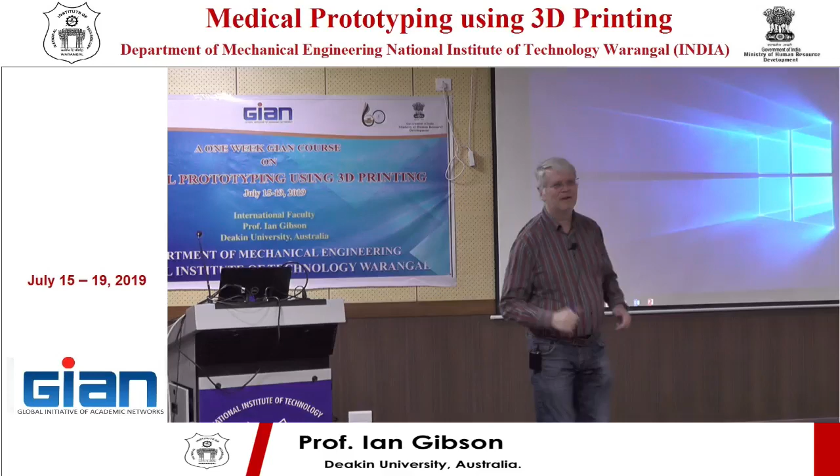Right, let's talk about the future. We'll do that on the board because we'll do that as I think, okay?

So what? Future of what? Future of additive, or future of additive in medical? What do you think we should talk about? In general, okay, so future of AM, yeah?

I've got a couple, I've actually got maybe a little bit. It's an old presentation which I gave. Did anybody go to Inside 3D Printing when I was presenting in Mumbai? No? Good, okay. All right, I'll show you the presentation I gave there. It was a couple of years ago, but I think it's still quite relevant to today and this kind of discussion. What is the future of additive?

But let's just move along a little bit. Some of the things that are coming to my mind, what I'm seeing a lot of at the moment is, if I see AM, there's sort of like a bit of a divergence effect, in fact. And the way I might be able to say it, maybe even three ways.

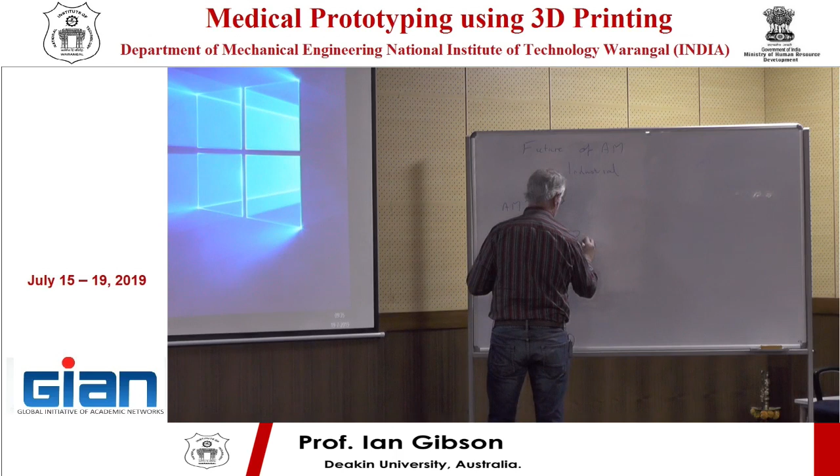Industrial, research, business.

From industrial, there's a lot of interest. What is industry looking at from additive manufacturing? So they have a number of requirements. Biggest one probably is quality assurance.

So when I say industrial in this context, I'm saying people using additive manufacturing for making things, okay? So direct digital manufacturing, as we sometimes refer to it, certainly what Brent Stucker used to call it.

So that might relate to things like consistency of build, ability to detect problems during or preferably before they happen, at least definitely detecting them as they happen, so that the worst case is you can stop the process. But ideally what you want to do is actually detect it during the process and maybe change the process to compensate for it, which means prediction.

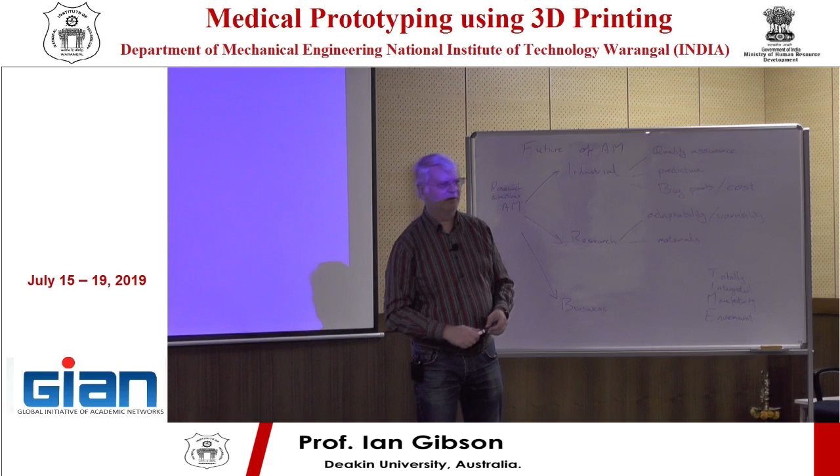I had this vision of some kind of carousel system - not just carousels with the feed heads, but carousels on the actual machine itself, where you can feed a part in a variety of different ways through a system, treat it in different ways, change the sequences, and come up with a lot of huge potential in variability. That machine, I can't remember the name of it now, that I showed yesterday, is kind of part of my vision of a time machine. So materials and adaptability are great for research and cost.

Bringing the cost down is one of the great things, and the reason why there are so many people excited by additive manufacturing is because we can all see it and see that we have access to it. It's cost effective, it's low cost, we can use it. I can give it to a student and not be too worried about whether that student breaks the machine, because it's not going to be a huge investment to fix it.

In the old days, you never replace them. I'm sure you've all had that experience: look but don't touch. And you don't learn that way. You learn from experience, you learn from doing things, and personally I say you learn from making mistakes. This is the disruptive side of me - the things I learned most were when I did a bad job, and I never want to be in that situation again, so I try my best to work at it.

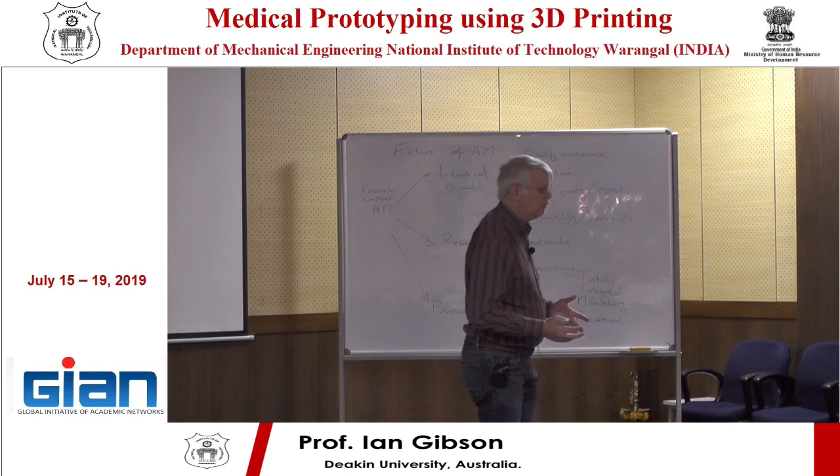Okay, anybody been involved in startups? A few. Excellent. How many people would say that they've been successful in startups? One, maybe. Yeah, it's a hard process. It's a very exciting process, and it's a very rewarding process, because you learn an awful lot outside of your own discipline, yes?

And if you don't, that's why you fail, to be honest. Because a great idea is only the starting point. Even a great product is only the starting point. How many great products have actually failed? Many, many, many, okay? I've got a good example of that.

And that's probably relating to what I've got here. And rather than put it up on this thing... the projector's shut down. Can we start the projector up again? My computer's shut down as well. I'm going to have a strong word with Michael Dell when I see him next time.

Just bear with me. Any questions while we're going at this point? Amazing, I think you guys have started to exhaust your questions. Finally. I have to compliment you all, by the way, for the amount of participation in this workshop.

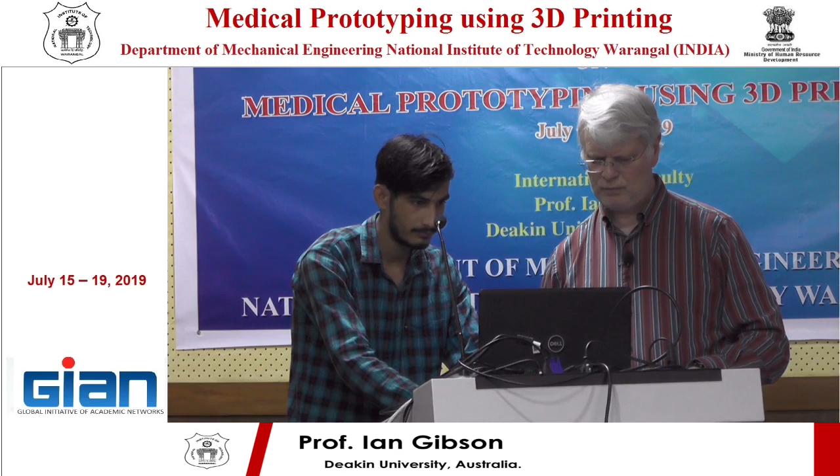Oh, I need sound. I think that's going to work. Let me check. That's probably because it's here. No, that's here, isn't it? Why is not sound? Oh, volume? No, it's definitely not coming through. Do I need the other thing? There was... Ah, yeah, that's probably in it. We're okay now, yeah. I'll try that. Yeah, excellent, good.

Right, so let's play this. Autodesk. We'll have a Zen moment. It's cool, this, isn't it?

Are any of you familiar with the Autodesk Pier 9 project? Autodesk have this location in California. It's called Pier 9, and it's really sort of like a bit of an incubator innovation center. And some of it's very interesting work, and you're probably familiar with the old zoetropes. These are trying to create moving images by just rotating them. This is a 3D zoetrope, an actual object that appears to be moving because it's rotating. And it's beautiful. I think some of the parts that have come off this, absolutely excellent.

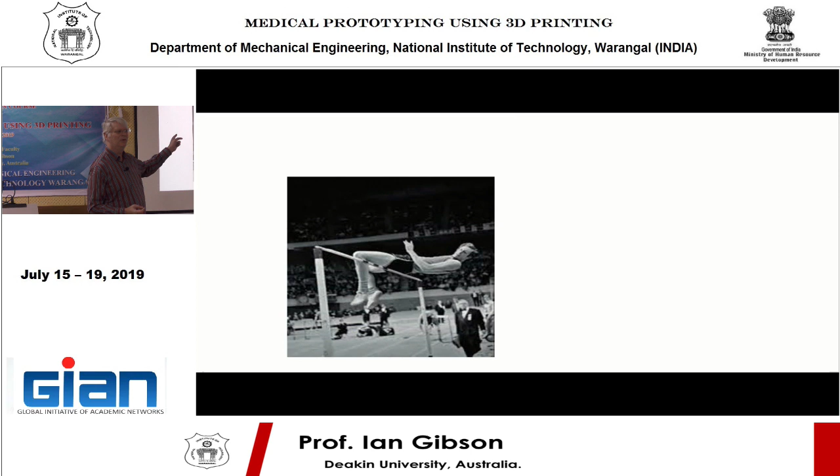Anybody familiar with this guy? Anybody think of his name? No? Any high jumping specialists in India in the Olympic Games? This guy's name is Dick Fosbury, and he's an American, and he was a college student, and he lived in a small dorm when he was at college, and he had the top bunk. He shared the room with another guy, and he had the top bunk, and he was a bit of an athlete. He worked out this method of getting into the bunk. You know, you had the door open, he'd go into the door and spin round and land on the top of the bunk.

And he kind of thought, hey, hang on a minute, this is actually quite a cool way to do the high jump, because before this guy everybody did what was called the Western roll, where you faced the bar and put your front leg and tried to roll over the bar. And that essentially was a limitation on how high you could jump. This guy then worked out a method to jump higher, won a gold medal. And now everybody jumps this way, and all the high jumpers have to be. So he was an innovator, the first person to do this, and he's a great example of what we call a disruptor.

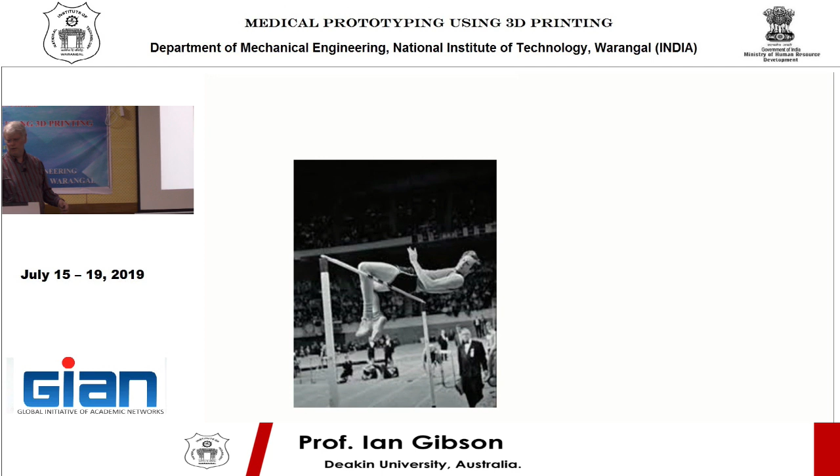So Dick Fosbury, basically what I would consider to be a prime example of a disruptor. And you think about this from the perspective of business. There's a couple of examples, it's about success in business. There may even have been people that tried to do this but maybe didn't have the skill that Dick had, or the stature or the athleticism. But he was the one that everybody now refers to, the Fosbury flop. That's the method of jumping.

So he was a radical changer, applied innovative thinking. Who's that guy? Fantastic. People know him, even though he's been dead for a few years now. Obviously, one of the people that we associate with innovation, correct?

But none of the technology that Apple produced was truly innovative from a technological perspective. It was the packaging, the presentation, the fact that you had an astute businessman, because that's what Steve Jobs was. He wasn't really a technical geek, because you had Steve Wozniak, amongst others, and Jony Ive and other people supporting the Apple technology and developing those key cool ideas. But he was definitely a visionary.

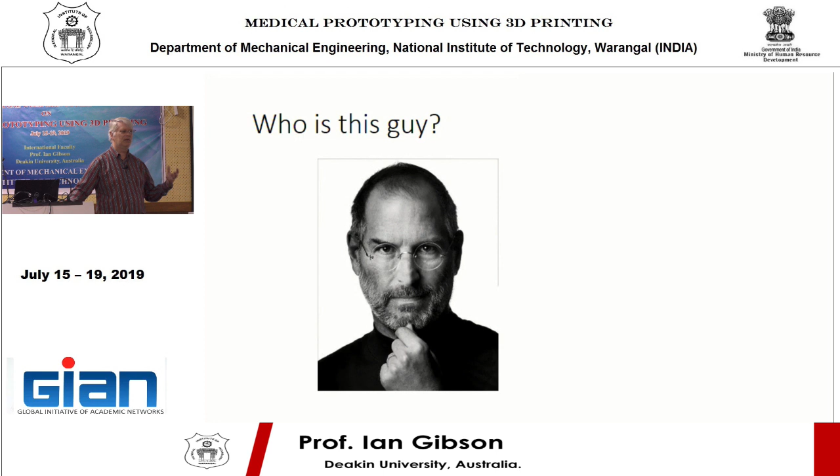He implemented or allowed the implementation of technology before it was potentially successful. Things like the touchpad - I mean, people do that, but he managed to package it up correctly. Personal computers, the iWatch, various things which other companies did as well, and sometimes did in a better way. But for some reason or other, the packaging and how it was presented by Apple was better and more significant. So he's definitely one of our most well-known innovators of the modern generation.

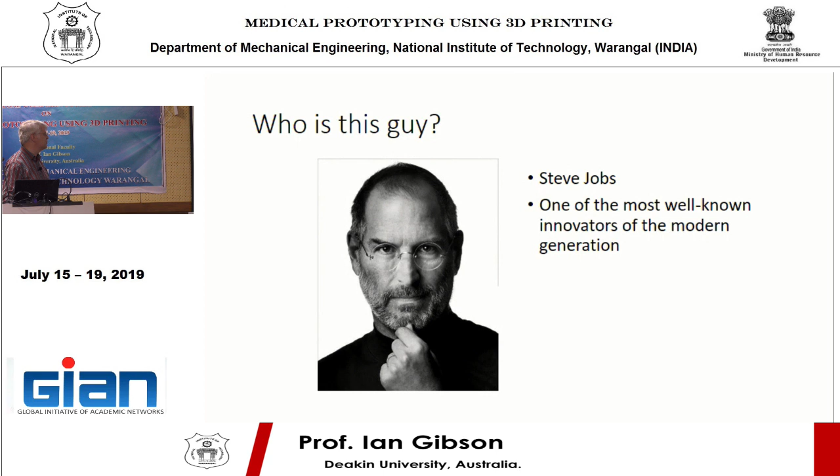Any idea who this guy is? Okay, I'd be very impressed if anybody knew who this guy was, particularly if you're not Australian. He's actually an Australian. His name is Silverbrook. And even now you probably don't know why I'm presenting him to you.

He is, however, an Australian inventor. He has to his name 4,665 US patents and 9,874 international patents. He actually holds the world record as the most prolific inventor alive today.

Most of his patents are in the areas of printing technologies, so a lot of the 3D printers that we use involve his patents. Sound technologies - a lot of the sound systems that we use involve his patents. So he's a technical inventor. All of these things in front of him are things that he has been involved with - that's his lab and his patents and stuff like that. So he's a very successful person, but we don't know it.

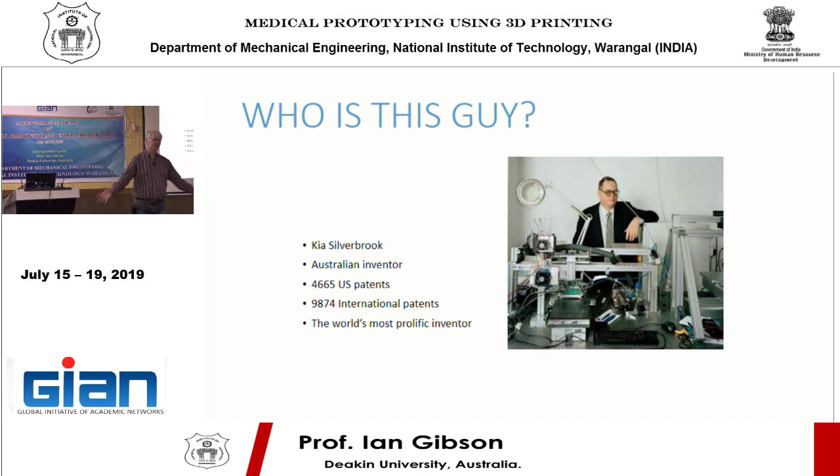So it's not necessarily - you can be successful without having to be famous, and possibly vice versa, I suppose, depending how you spend your money. Worthwhile mentioning that there's room for lots of different types of people in this environment as well. And I suspect he'd be the sort of person that would be behind somebody like Steve Jobs, helping him to supply the technology, which then people like him can then promote.

I think we also know about James Dyson, yeah? This figure, however, is another number which is worthwhile bearing in mind. He's famous for this vortex-based generator for vacuum cleaners - the bagless vacuum cleaner. The fact that it's a very efficient way to create a vacuum, it doesn't degrade in vacuum suction power over time because it doesn't clog up as easily, things like that.

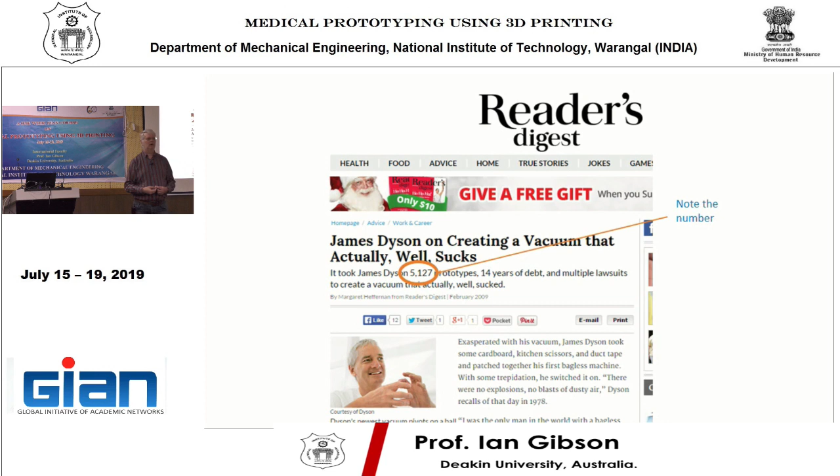Before he got to a working prototype that he felt worthy of presenting for production, he went through 5,127 prototypes. So he's cataloged this - I always present this to my students when they're doing their final year projects, because I say, look, don't divide your time up by beginning and end. Divide your time up into segments where you want to achieve a particular goal, and then continue doing that in an iterative way.

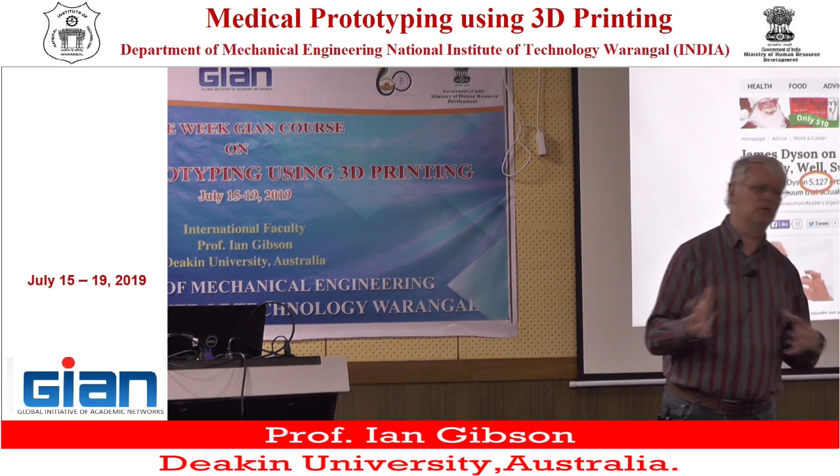Most students, when they think about their project, they think, okay, this is the problem, this is what I need to provide, I've got 10 weeks to do it, that's my project. What we look at, particularly now that I'm in a design, production and management department, is I get my students to think in segments. And you should think the same way, whether you're a researcher, whether you're thinking about setting up your own business, even if you're an educator.

I hate education systems where you basically say, what do I need to teach in order to fill up 10 weeks? Because that's what most courses are - you have a 10-week or a 12-week semester, and you're supposed to teach fluid dynamics, so you continue teaching fluid dynamics until the time is up. Nowadays, what you should be doing is thinking, what does my student need to know? How much fluid dynamics does that student need to know in order to solve the problems we are currently working on?

So myself and my colleagues, we break up our course material in that way. And if it only requires 2 lectures, then only deliver 2 lectures. Now bear in mind, this is coming from a person that has been told he has to present 10 lectures on a subject of medical prototyping. I realize there are artificial situations in everything we do. But the important thing nowadays is that we want our students to be work ready. And if you want that to happen, you only teach the amount of fluid mechanics or fluid dynamics that you think they'll need to get a job.

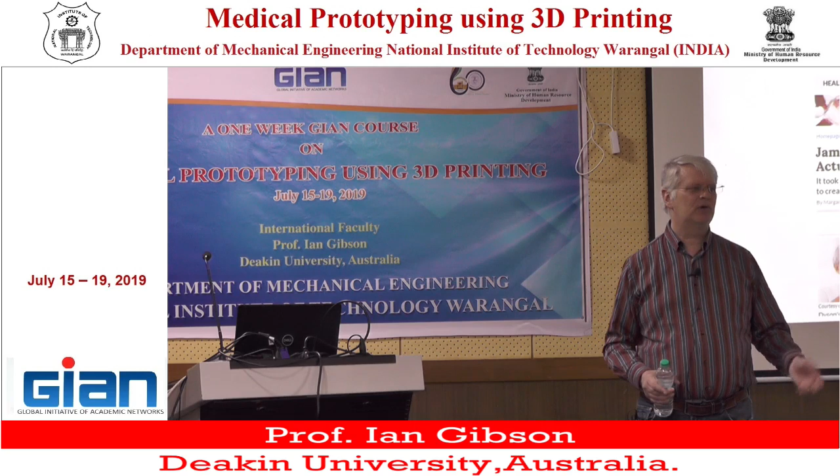And that might be different for one student to the other. So what we should now be going back to is the old days. Oxford and Cambridge universities still teach that way - there's very few lectures, it's nearly all tutorials. Your students go in little groups to the professor, talk around a subject, and work out what it is you need to know. You guide them through the learning process. Because you've got very clever students paying lots of money for tuition fees, it can be enabled that way. But we should all be doing that, to be honest.

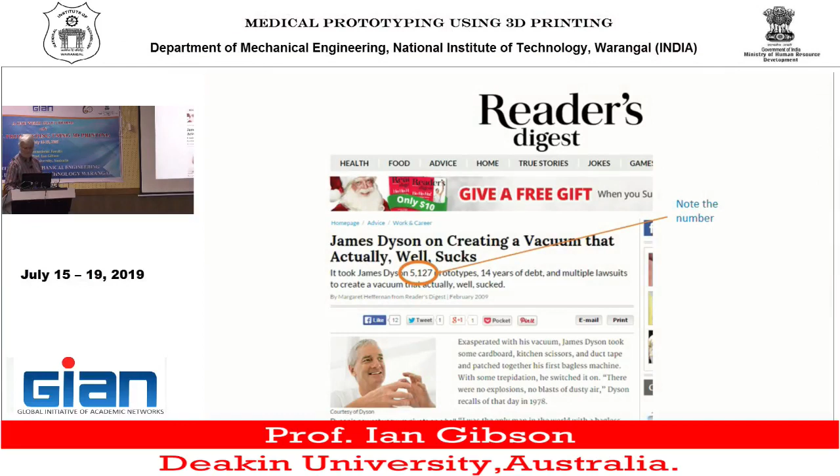Anyway, I am, as usual, moving off topic. So I've got a few images now where I want to enthuse people or encourage people to be thinking creatively and innovatively.

So the fashion industry is now starting to use additive manufacturing in a variety of ways. A lot of them, in my view, quite questionable. Visually, the impact is fantastic. I prefer clothes which are comfortable, and I haven't really come across many examples where 3D printing helps with that yet.

I mentioned about things like gaming figures, and the fact that whether we like it or not, a lot of people spend a lot of time and money on playing games. This is part of our society's culture, you call it what you will. I suppose it's always happened. The thing now is that you should be considering the possibility of making businesses out of it.

Musical instruments - it's becoming more and more common these days to use 3D printing. It's a great combination, if you like, of combinatorial technology, where you're combining innovation and creativity with functionality.

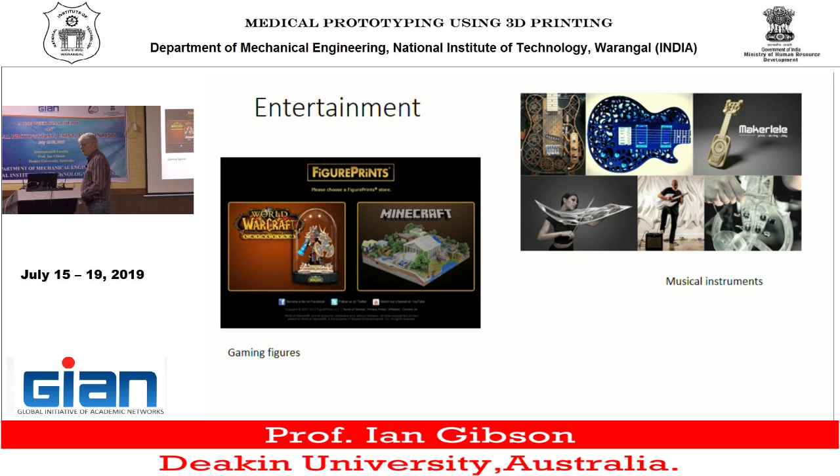I mentioned the FigurePrints thing - there was a video about how you produce these FigurePrints. So your 3D printed model starts off as the game model.

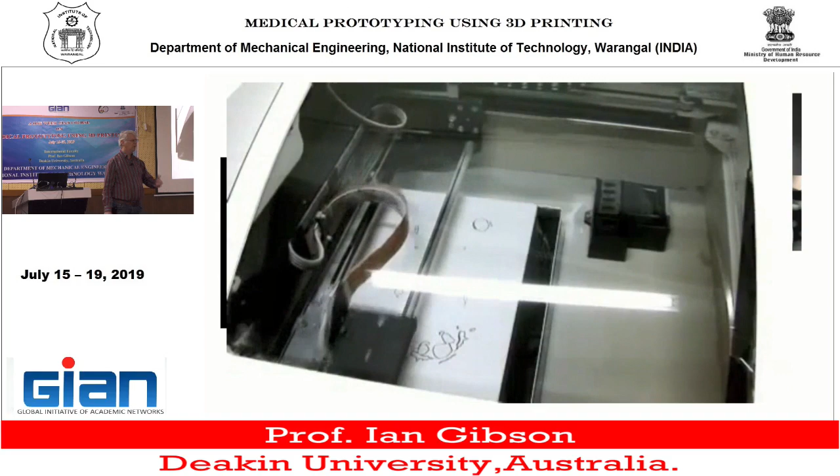Think about what I mentioned about gaming when I talked about scanning technology. You can fool people when they're playing a game that something is more three-dimensional than it actually is by using bitmap ray tracing techniques and rendering methods. That doesn't work when you're actually 3D printing, so there's actually a lot of post-processing of the game data before you can make the part.

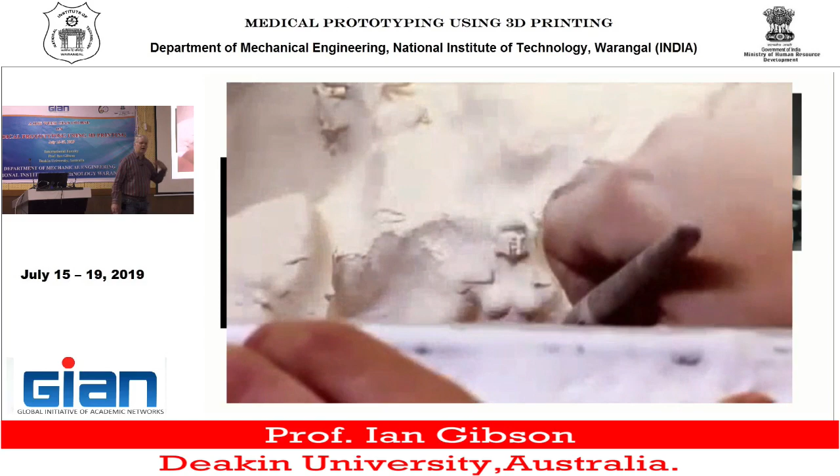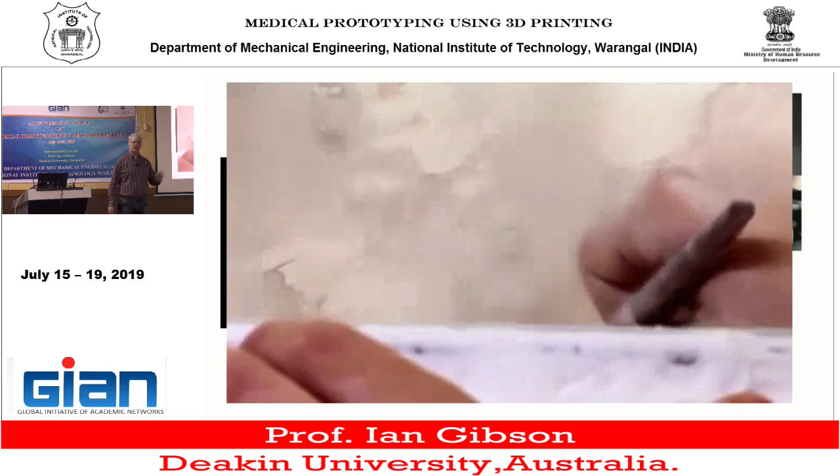For example, if the character is wearing a cloak - a cape - that cape in the game is a zero thickness surface. And if you print that, there's nothing there. So you have to post-process the game data to apply thickness to the components. Some of the features might be very fragile.

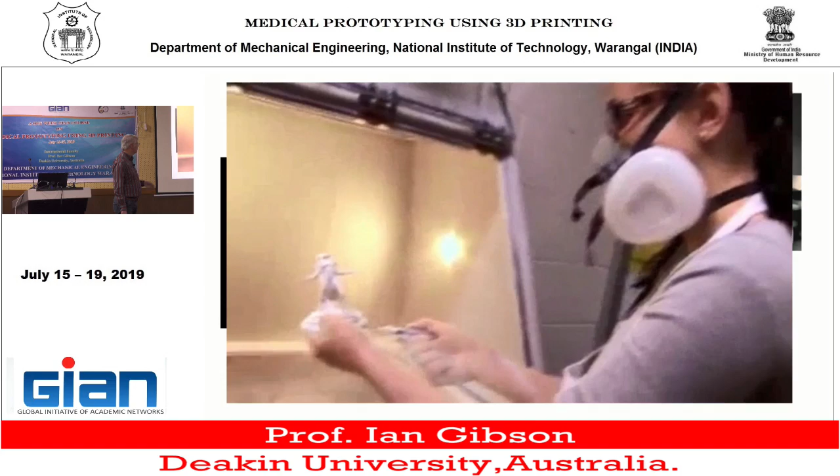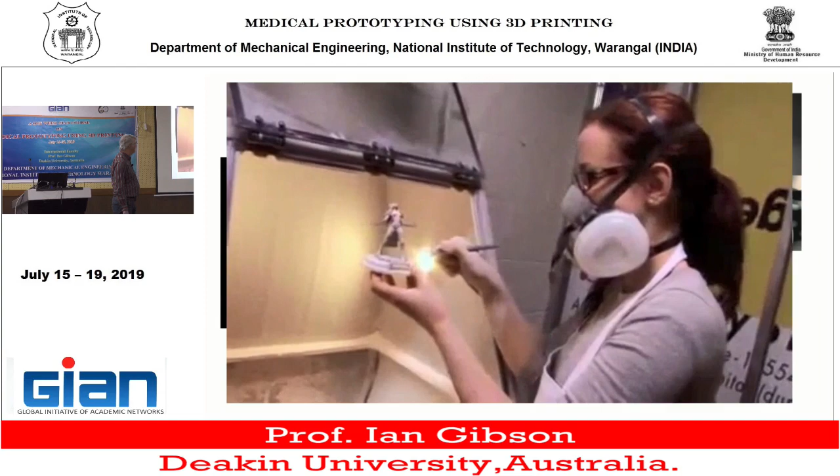So this is the powder binding method. You've got a printer head gluing powder particles together, and now you can see the part being uncovered from the loose powder, using an air jet to blow off most of the powder.

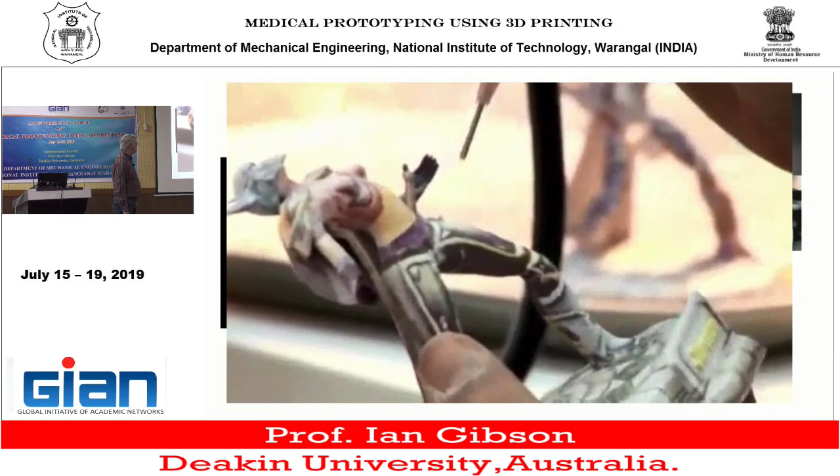It doesn't look very impressive at the moment because it looks all kind of dirty and still has lots of powder attached to it. So there's additional touch-up that needs to be done with maybe a more precise air jet, cleaning off all the finer details. Still doesn't look fantastic because the color is kind of embedded in the powder itself a little bit.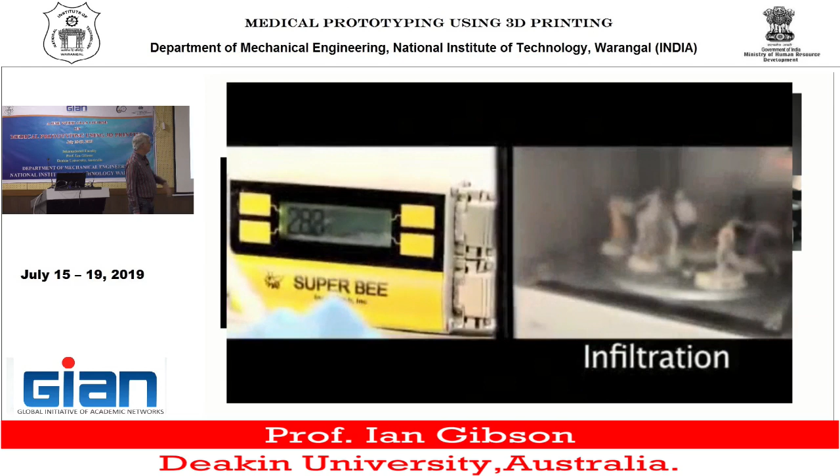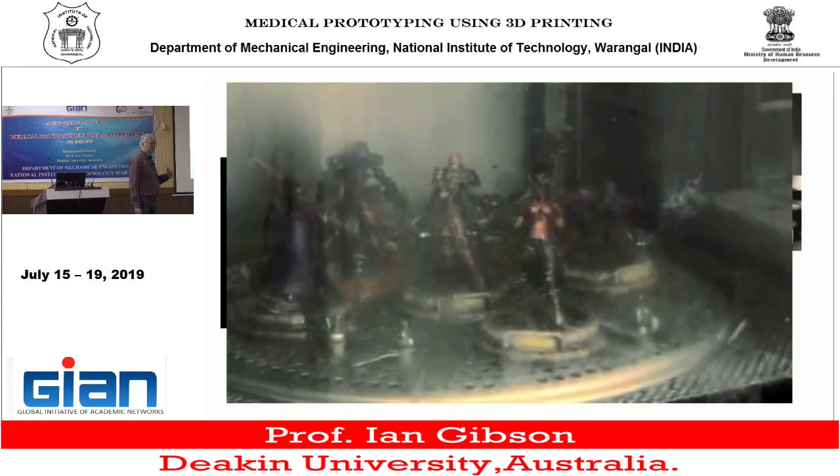So this is an infiltration process. I mentioned that the parts are quite weak, so you have to soak these parts in a resin - that's them being dipped into a resin bath. The resin basically has two purposes: it strengthens the part, and see the parts coming up now - it also enhances the coloration because it stops the reflectivity or makes them more light absorbing.

So now the parts look pretty good. You need to just bake them so that they're nice and tasty.

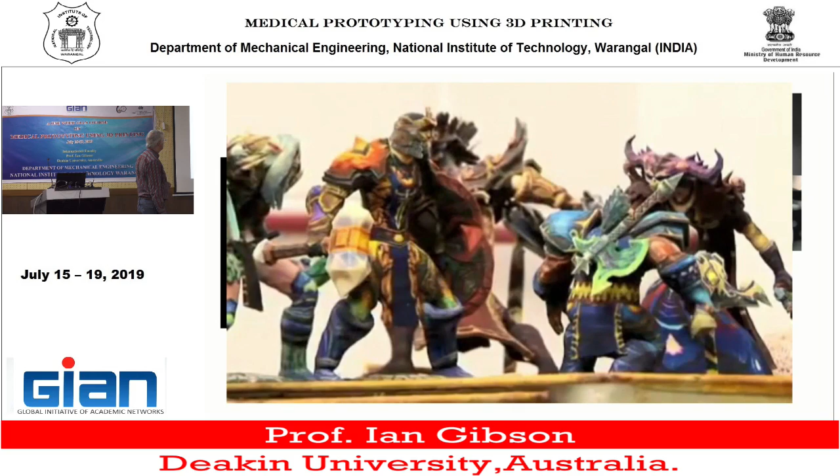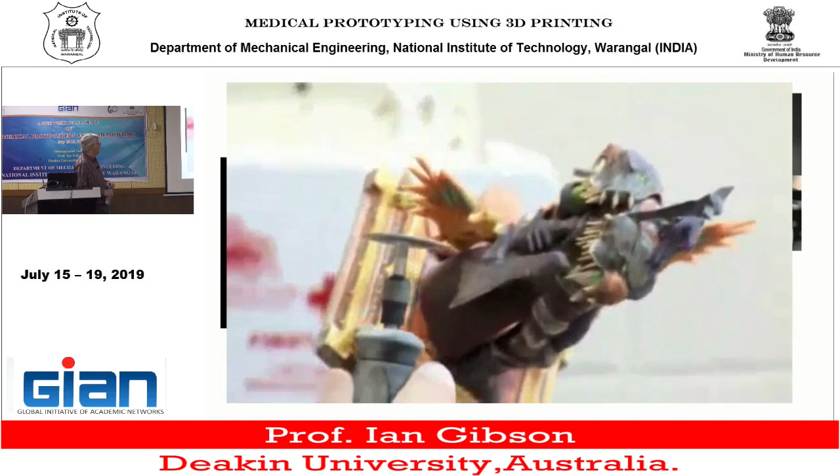And now you can see the colorations—this is a few years ago. The videos, they're getting better and better, and the color quality is improving. In fact, the Objet Stratasys machine, which produces color parts, has even better coloration on their parts. However, I think the cost would be prohibitive.

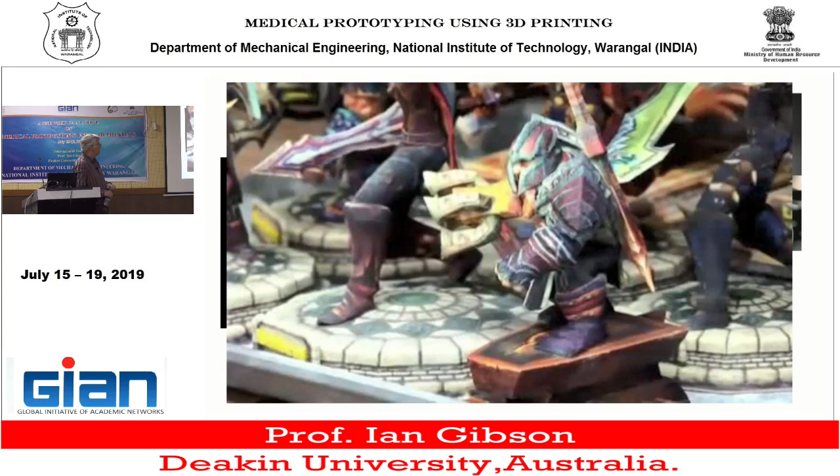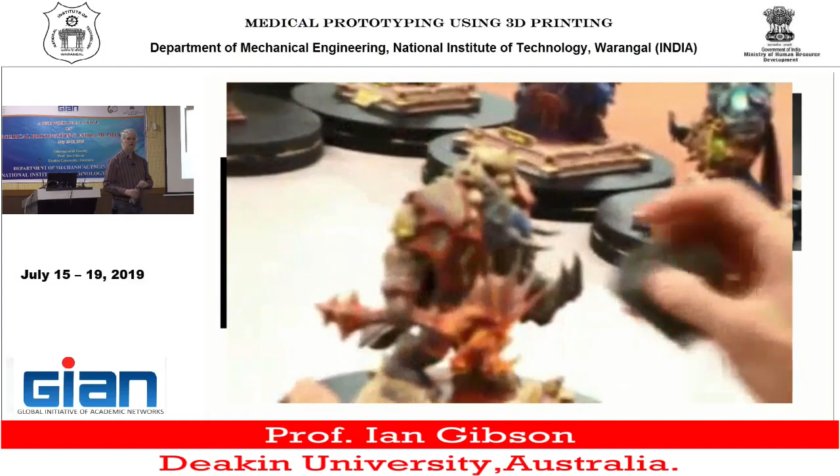So this is kind of cost effective. The model you're seeing here, about this size, is around $100 US. Expensive, but not hugely expensive, particularly if you're a fanatic, I suppose. It says made in Germany—I didn't think they're made in Germany. So pretty cool.

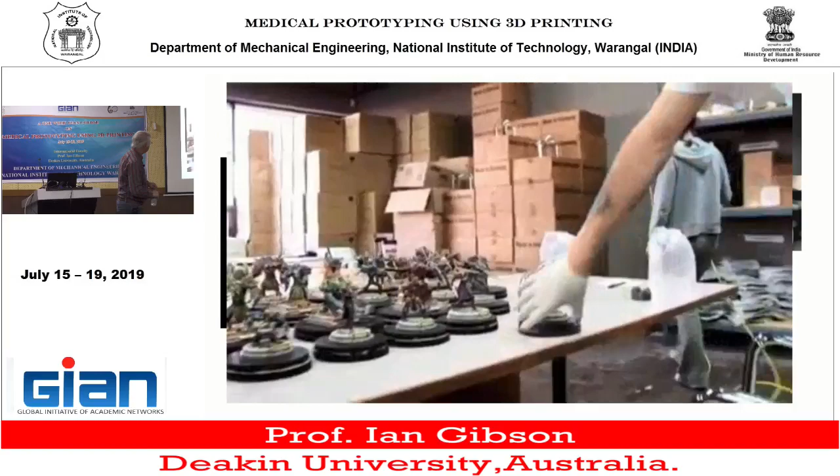Some ideas about—well, they're not really new business ventures anymore. In fact, for new business ventures, you should look to companies like Shapeways to find out who's using them as their shop floor. And there's a few other portals for setting up businesses now. As a matter of fact, there's a lot, I guess.

What would be a common one in India for doing this kind of thing? Is there an Indian version of Shapeways? No? So there's no entrepreneurial Indians making stuff on their 3D printers and selling them over the internet? Yeah? But it's not a popular process. Okay.

Okay, so they make their own websites, essentially. Yeah, so nowadays, particularly in Europe, the US, China is really big on this as well. I mean, people now set up their shop entirely within Amazon or eBay, or Alibaba in China. Shapeways is slightly different because it specifically deals with additive, but there's a lot of potential there.

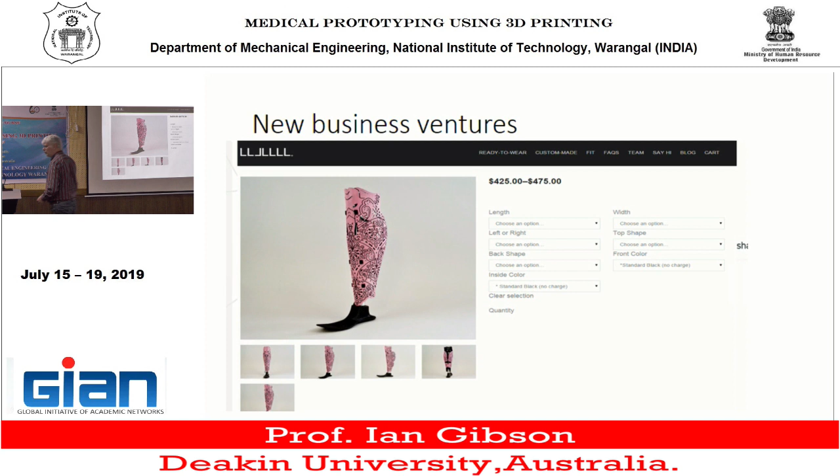So good examples there. What else have I got? Oh, sorry, back. No. Going back. Back. Stop. Go back to food printing. Right, okay, because of videos, you see.

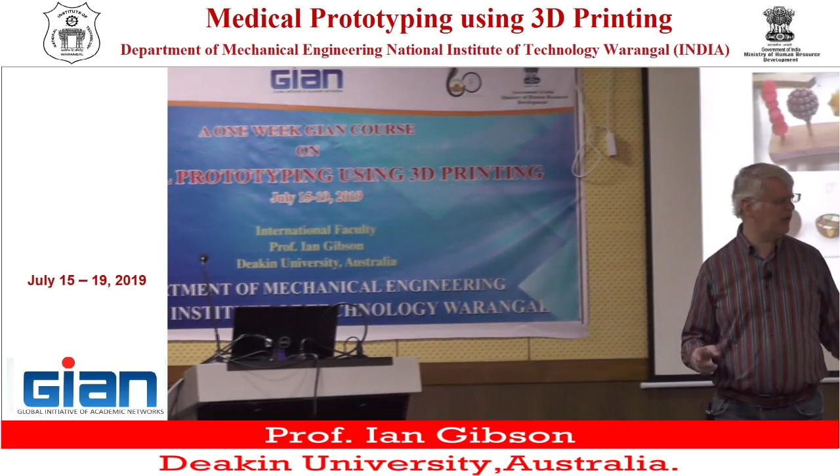So a few people have already mentioned food printing. There's quite a number of printers like this sort of thing, the chocolate printers. Do you get Cadbury's in India? Yeah? So Cadbury's just a couple of days ago launched—because I think they're 100 or 150 years old or something—a chocolate printer as part of their birthday celebrations, I think.

So confectionery printing I kind of understand, because you can often associate confectionery with customization. If it's somebody's birthday and you want to present something spectacular, you don't do a personalized curry, I don't think—you might do a birthday cake, yeah? So obviously you still need to feed them curry, but that's not the purpose behind the 3D printing. That's where I think there's a bit of confusion. The idea of having something like a curry and 3D printing doesn't make sense to me, but some people seem to think that's a good idea.

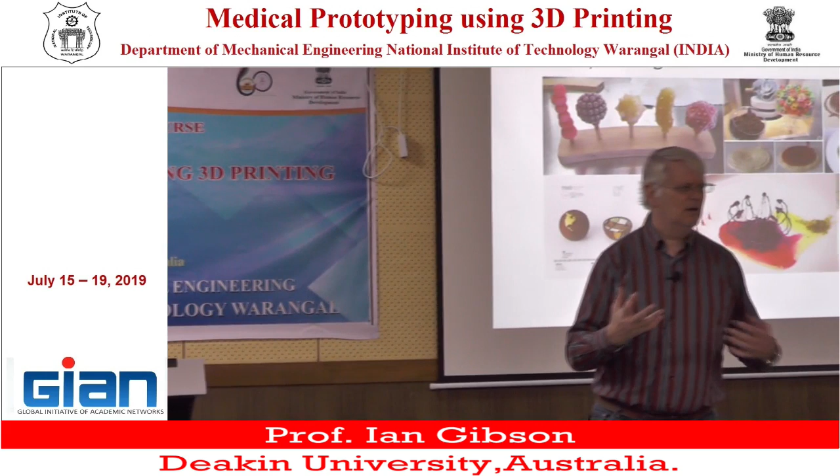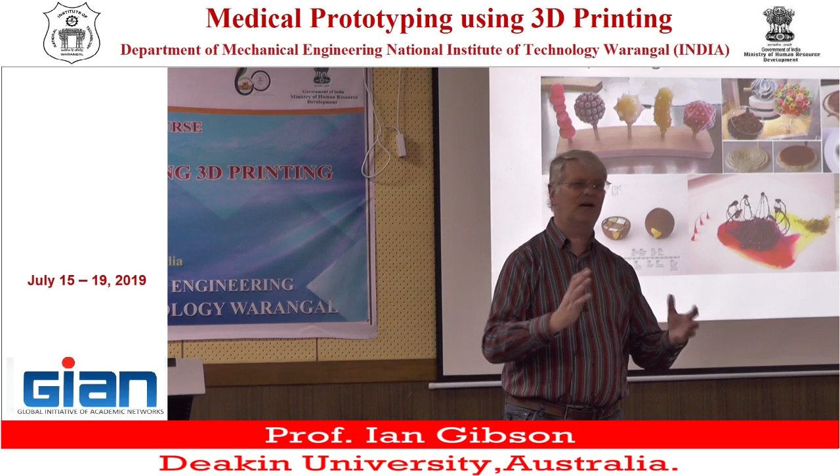There is a cooking technique called molecular gastronomy. Has anybody heard of that? No? Yes? Okay. So in that, you actually work on usually very small items, and sometimes you make them so they look like they taste one way, but they actually taste completely different. It looks like a candy but tastes like a curry, or vice versa, or they have very specific flavors, and it's like a chemistry process—it really is. They use liquid nitrogen and hydrogel techniques. So there's a lot of molecular gastronomy that's kind of like what some of you guys are thinking about from tissue engineering, and there are people playing around with that.

The first example is kind of like this thing here—in my mind, I think this is just growing food. The first one I came across was a restaurant in America that was playing around with 3D printing, and they produced a shrimp paste, which was very tasty, very organic, and used the best ingredients and things like that.

But then they used a printer to make them into shapes, so they had a 3D printed shrimp paste model of the space shuttle, and they used to put those on a plate with a little moon on it, stuff like that.

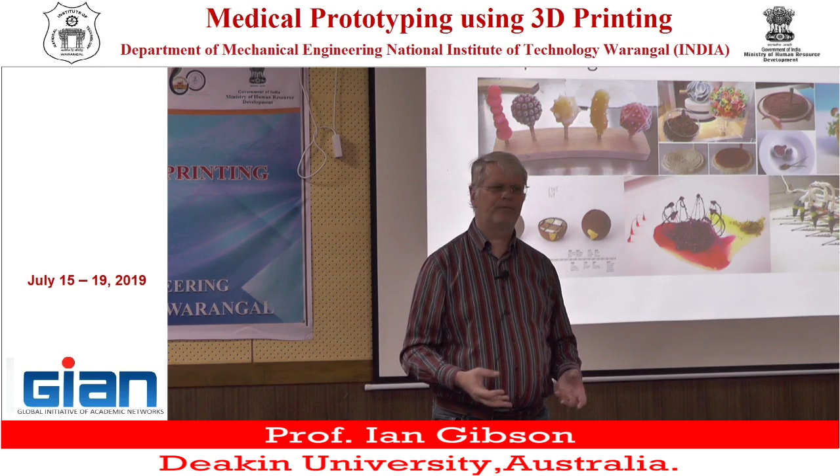So I can see that 3D printing will go into the culinary industry. You may even find that you can buy 3D printers for your own home that are based around food - there's just recently a 3D printing pasta maker.

I kind of think you do this 2 or 3 times and everything's wow, and then 4 or 5 times you think, oh well, it's a bit too much trouble and I'm bored with it and I want to do something else. Yeah, so that's kind of how I feel about food printing.

There's a very good friend of mine in America, his name is Janne Kyttanen, and he's famous for doing a lot of lighting products and stuff. His more recent venture is to make 3D printed ice pops. His business model is he does it for conventions - we could have a GIAN ice pop, and he'd make them for you using a 3D printed ice pop mold. That'd be pretty cool, wouldn't it?

Let's go have a tea, and you should have thought of this, Ravi. You should have thought about it - we have tea time, we go out there, and we've got a 3D printed samosa or something like that, huh? Okay.

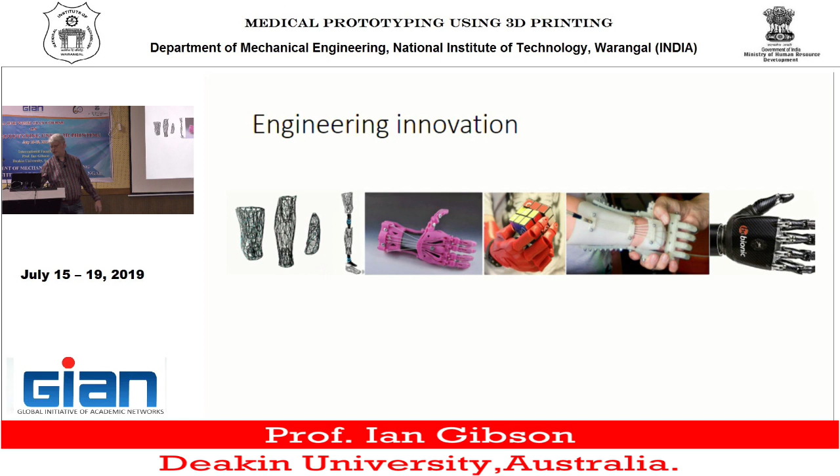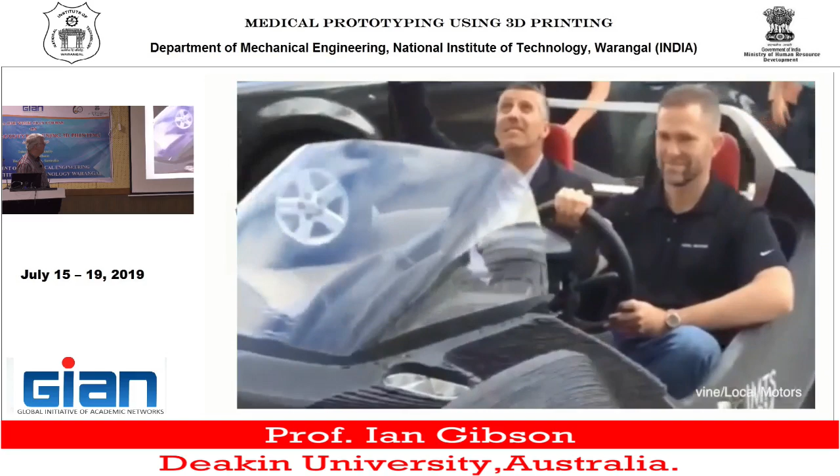Local Motors recently created a 3D printed car called Strati. A car exactly how you want it, built while you wait. The vehicle was made during the 6-day-long International Manufacturing Technology Show in Chicago. Local Motors partnered with Cincinnati Incorporated, the Oak Ridge National Laboratory, and the Association for Manufacturing Technology to make the car a reality. The Strati is a 2-seat electric auto with a top speed of 40 miles per hour and a range of up to 120 miles.

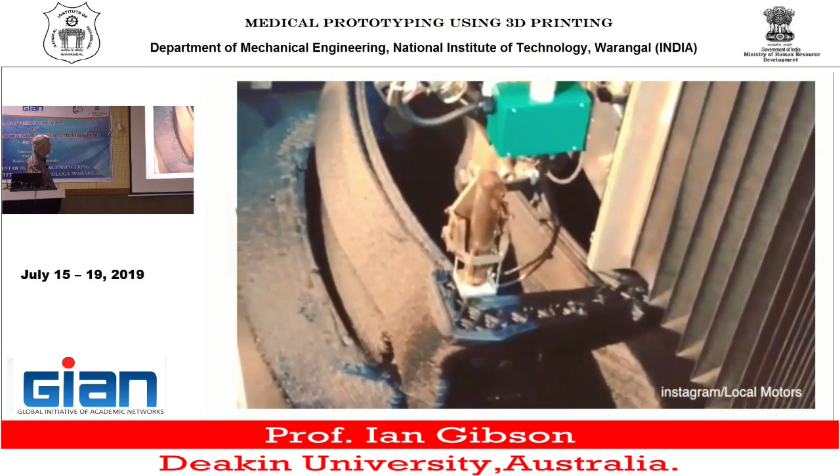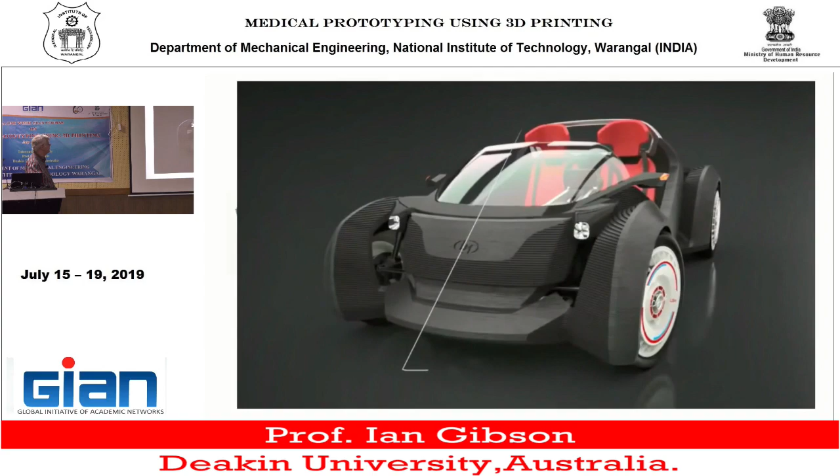Staffers at Scientific American say the vehicle was built in about 45 hours. Less than 50 parts were used in the final product. Items including the battery, motor, and glass windows were added after. The Strati project isn't just an experiment - Local Motors hopes to market the vehicle sometime this year for a price of up to $30,000. CEO Jay Rogers remarked, 'We expect in the next couple of months printing a complete car to be below 24 hours and then eventually get it below 10 hours, down from 45 hours currently.'

Interesting. Oops. I'll skip that one.

So again, a good example - we've discussed this already yesterday I think it was, so just to prove that it does exist.

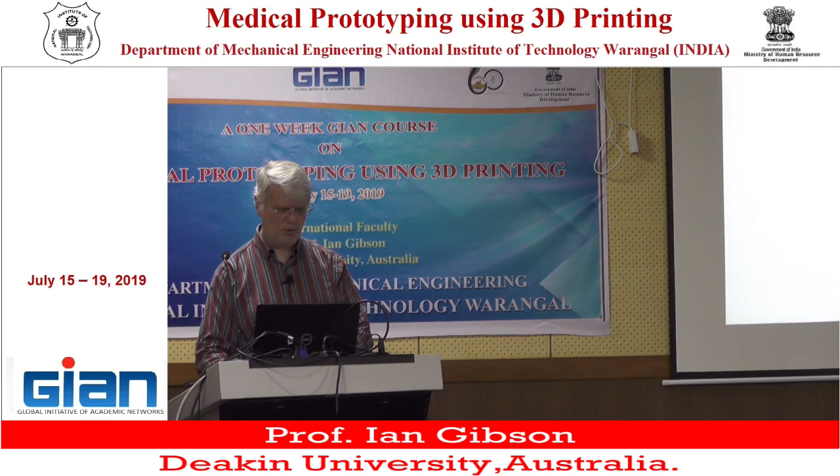Another one which is more of an innovation sort of thing, industrial design. There's a lot of designers playing around. There's any number now of customized in-the-ear earphones - one where you take your phone, take a picture of your ear, and send that off, and then they design it so it fits in the ear and the earplug doesn't fall out, that kind of thing.

And all sorts of things that are either completely built using additive manufacturing or definitely prototyped quickly and easily, and maybe even the tooling developed around it. This one - I don't know if you're familiar with some of the work at MIT by Neri Oxman - so this is glass printing.

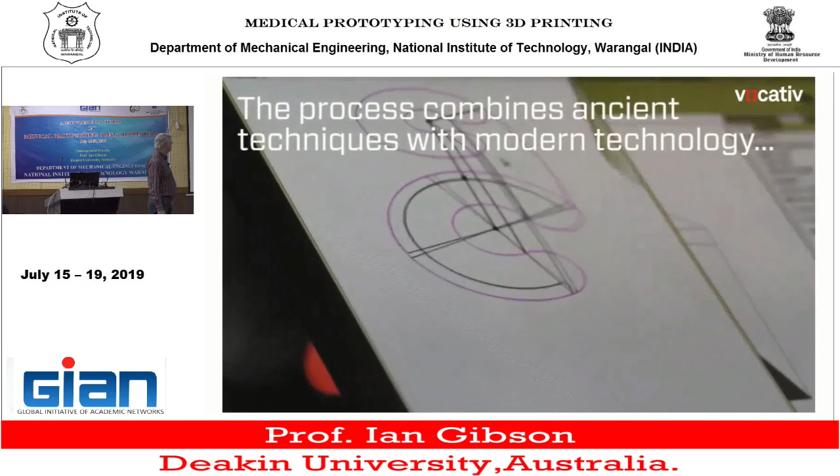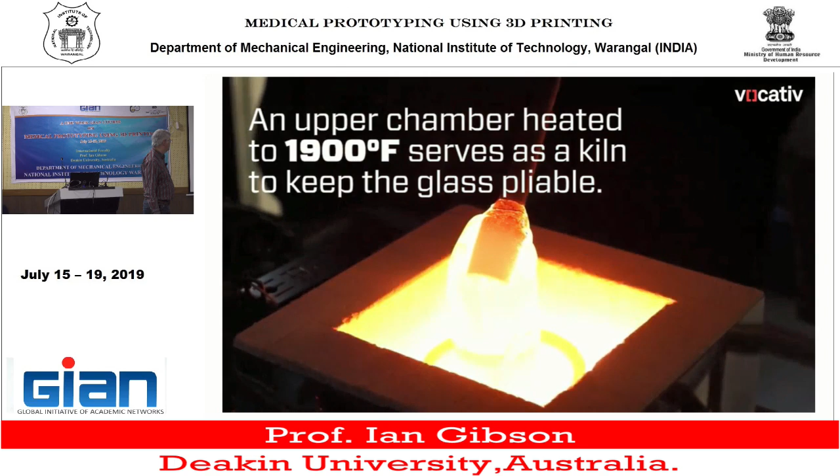It's pretty cool. Yeah, there are obviously some limitations to this. As you can see, it's not totally transparent, so it's not really about providing functional glass lens type technology, but more playing around with optical effects, and more for the purposes of visual. But again, proof that it can be done.

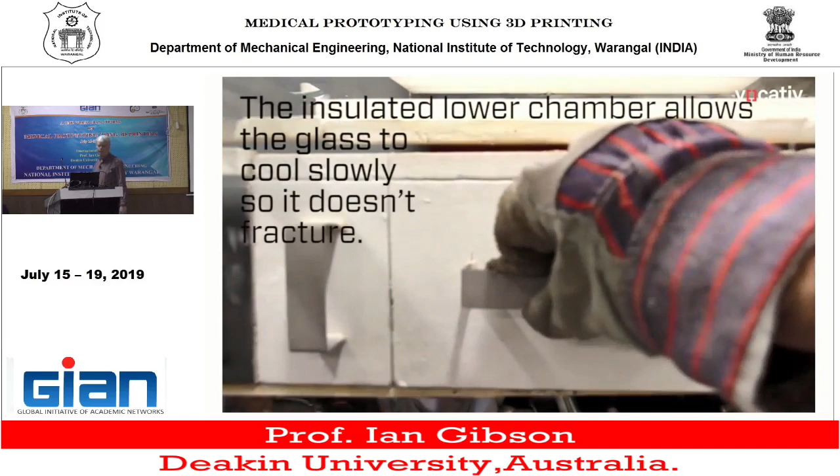And if you've got some ideas and you've got a really expensive lab and great funding, this is what you can do.

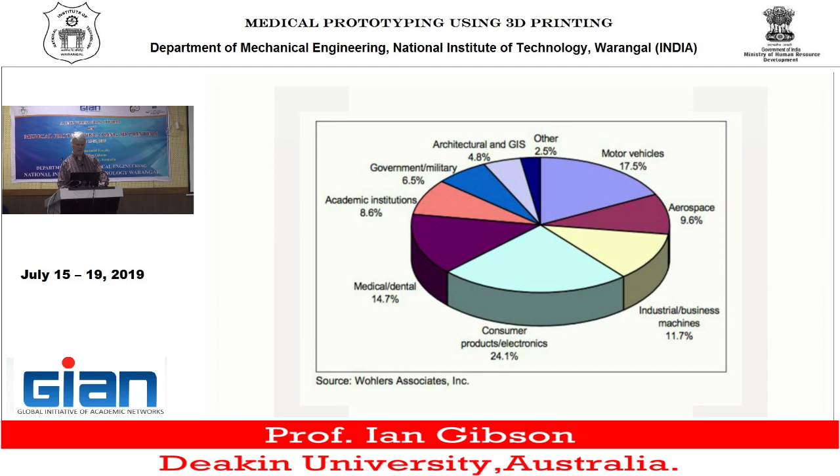Let's skip all that, I don't really want to be doing stuff on business. This one, even this is not really relevant - $8.4 billion market, I think it's already getting there. I don't think it's not going to be 2025, it's going to be twice that by 2025, I think. We're really talking about extremely large growth.

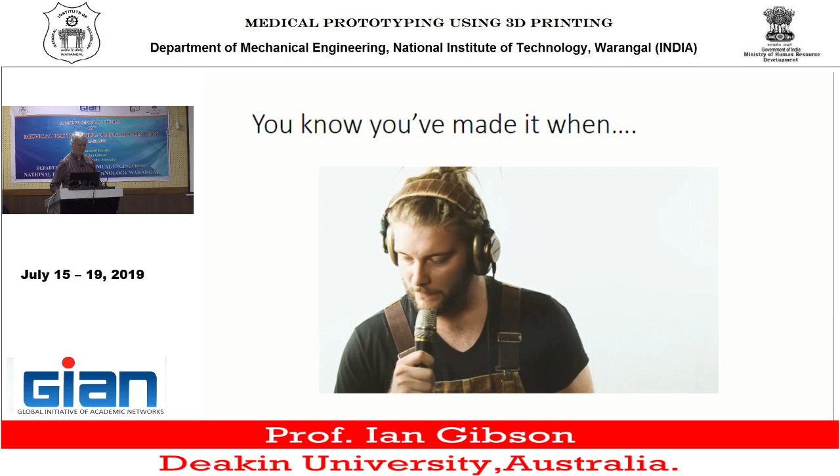This one, I don't know if you've seen this video before. Anybody? No? Just a little bit of fun. You ready, Bobo? DJ Bobes? Yeah, hit that track.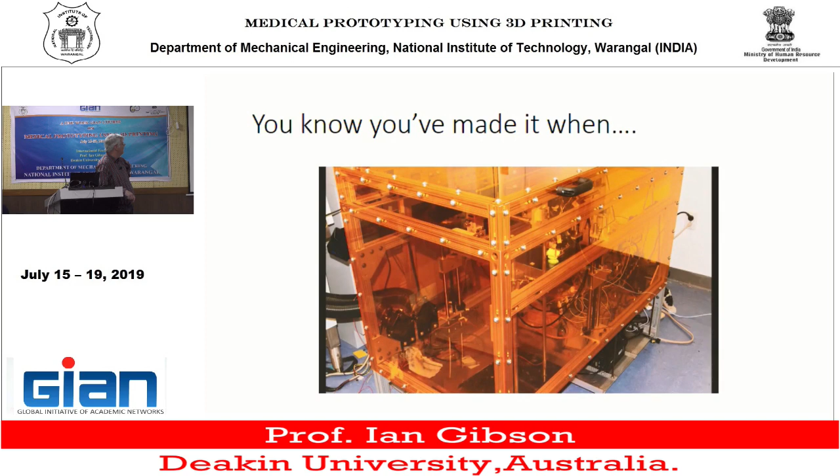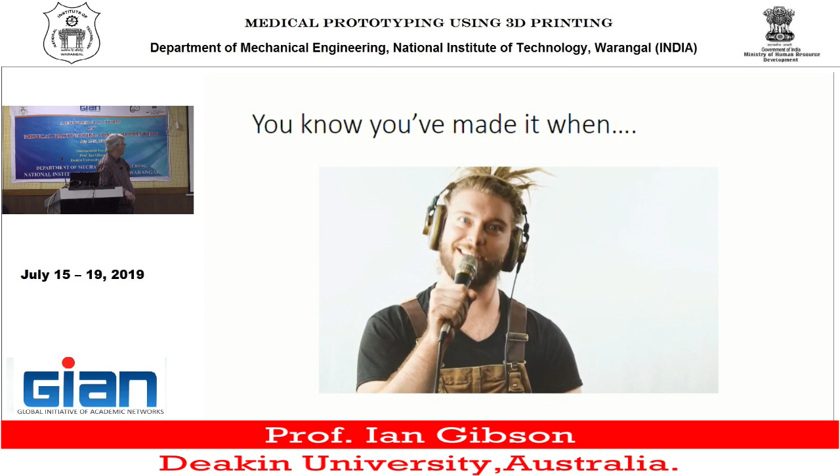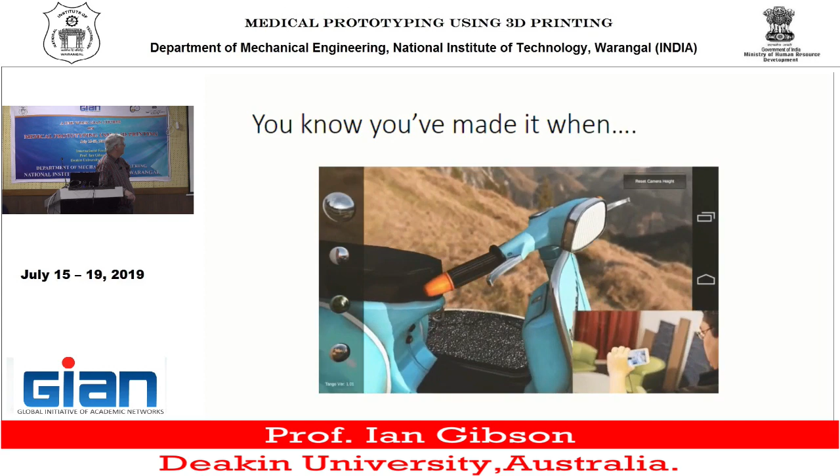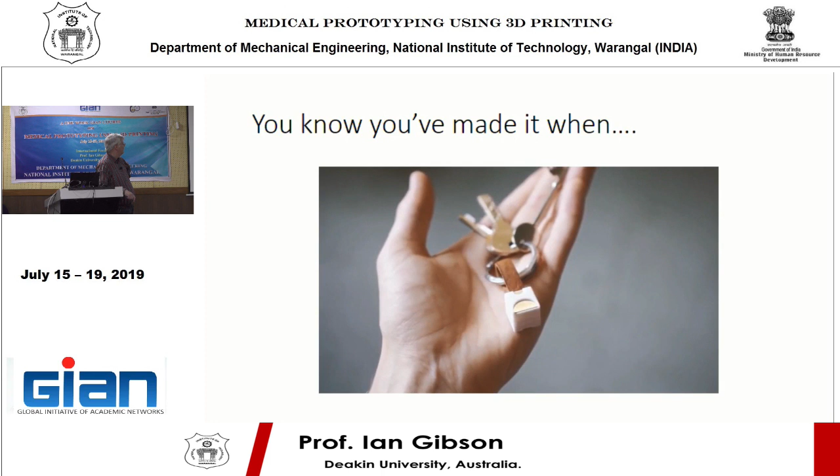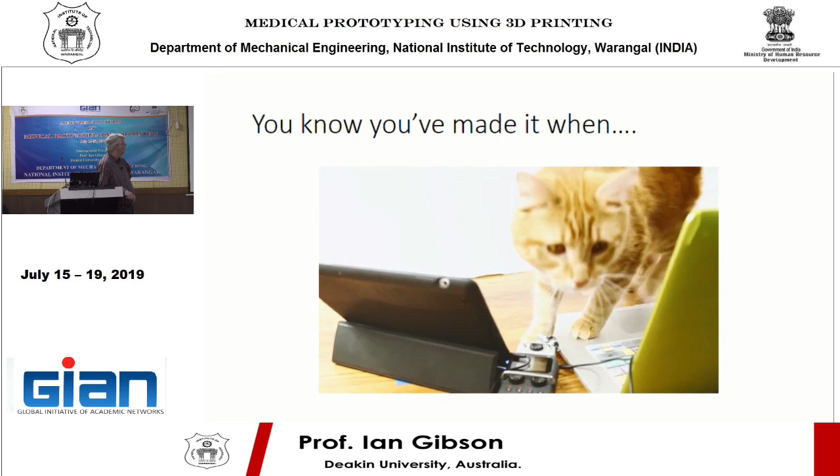Okay, it's quite good for a Friday morning, isn't it? Yeah, we are. All right, so what do we got? What are we doing there? Is this your exam, or is this just a QA? Just a feedback session? Oh, it's a great time to do the feedback session. Thank you.

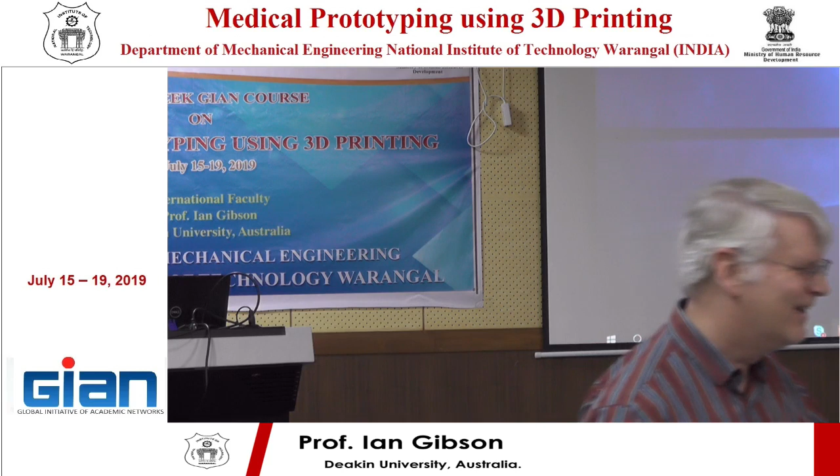On jewelry? Yeah, loads, there's a lot. I know, you told me that Rutesh has got some problems, is he? Yeah, okay, so my ring was done by a guy called Rutesh Shah, who runs a company, or did run - is it still in existence, the company? Yeah, called Innovarium.

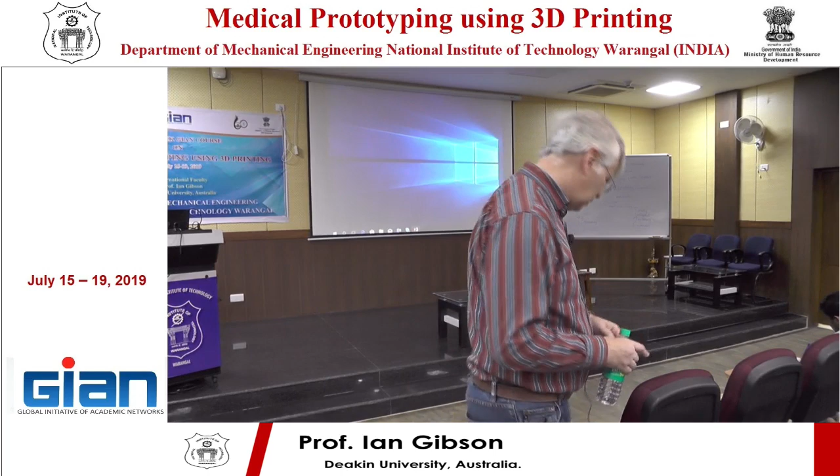So he used kind of like a conventional mixture of 3D printing and casting for conventional jewelry production. But there are now quite a lot of gold printers available - there's at least 3 manufacturers that allow you or have the capability for printing gold. One of the most famous ones is actually in the UK, a company called Cooksongold, and it's based around the University of Wolverhampton near Birmingham, and they've been running for quite a long time.

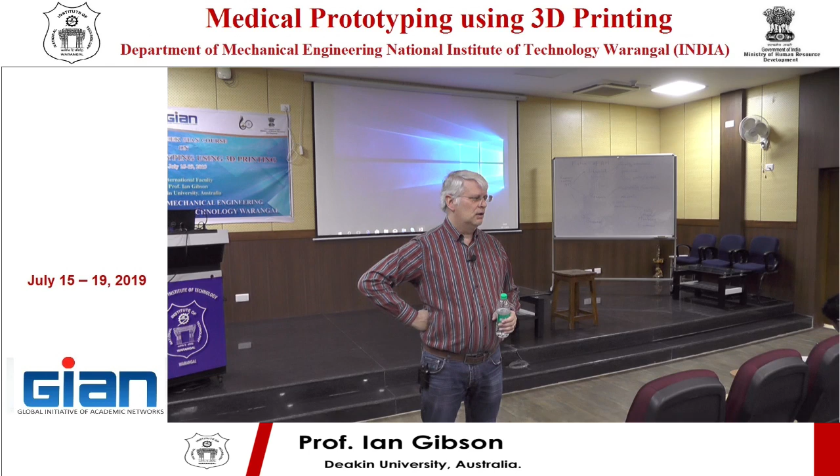And in fact, I got another ring done for my wife, which was printed in gold. So this one wasn't printed in gold, but it is possible. In South Africa, Central University of Technology, they're looking at platinum printing.

It was interesting. They started work on this a couple of years ago, and I was talking to the researcher there. He told me that the sponsor is actually a mine in South Africa, and in order to deliver the platinum, they delivered about 3 kilos of platinum powder.

They shut down the university on a Sunday to make sure there was nobody else around. They had armed guards, then flew in a helicopter with the platinum, and had an armed guard escort it from the helicopter to the lab for processing. Then they did their experiments and things like that.

They had to account for every gram of material, so they had to deliver it all back eventually. They did the same thing in reverse, took it all back, and the mine weighed how much powder and all the things they'd made from it, to make sure it hadn't found its way into anybody's wallet.

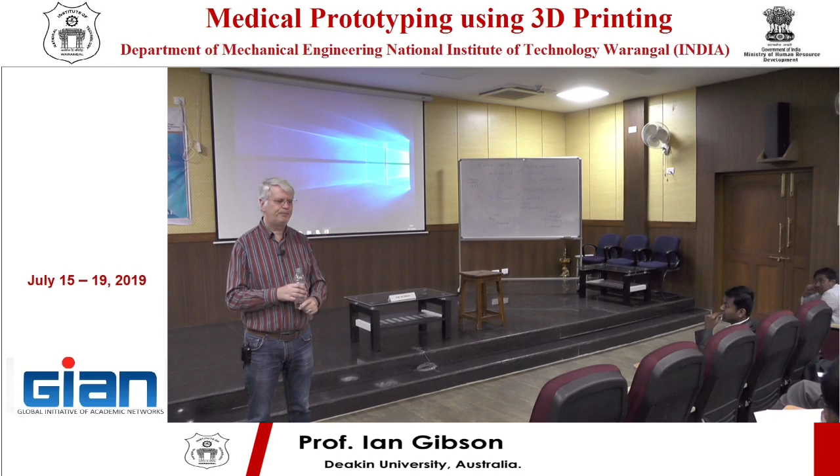Another good friend of mine, his name is Lionel Dean. He's a British designer who's been working in this space for 20 years or more, making and designing jewelry as well as other stuff. He's got a few examples, and he's the one who actually designed my wife's ring as well.

The majority of the systems will be powder bed unless they're using a casting system as well. A lot of dental work also uses gold, so micro casting, precision casting of gold is a well-known and well-understood process. It's not really a problem space. The problem is really about materials handling and some of the processing if you're doing powder-based sintering.

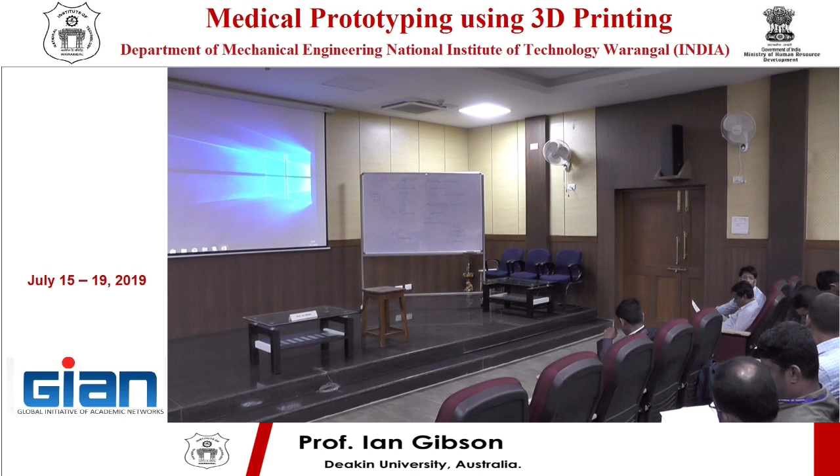That starts to come into specific technological solutions, so there are always ways to do finishing. Even in a normal jewelry manufacturing facility, if you're doing lapping or burnishing, they still try to recover the materials afterwards.

A lot of it is about the precious material, and you want to be able to recover it. Cookson have experimented with a whole variety of more conventional finishing methods, like hand finishing, and some automated methods like barrel finishing. They all kind of work. One reason gold is chosen is because it's quite easy to work with—it's a soft material, so it's easy to get a nice finish, and you can play around with the finish very easily.